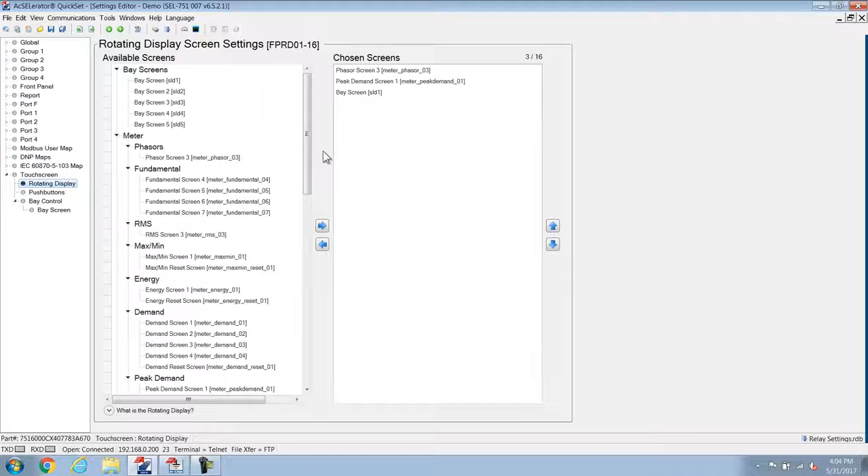Another portion here is the push buttons. The push buttons on the relay can be programmed to open specific screens on the device. Since we're going to be working with the bay screen today, I'm going to change push button 8 to show bay screen 1, or single line diagram 1.

Next is the bay control section. This is where I can either create a new bay diagram or single line diagram, edit an existing single line diagram, reset to defaults, and also import and export them.

I've already selected edit here, so we'll jump into the new piece of software that comes with AcSELerator QuickSet, which is Bay Screen Builder. Now that I have Bay Screen Builder open, a few things to notice here are the symbols.

In this symbol palette, you will see breaker symbols, disconnect symbols, analog and digital values, as well as other symbols available to create your one-line diagram. These symbols are available in both IEC and ANSI.

As you can see, I've already started creating a one-line diagram for our feeder. So today we're going to finish creating that one-line diagram with a few various objects.

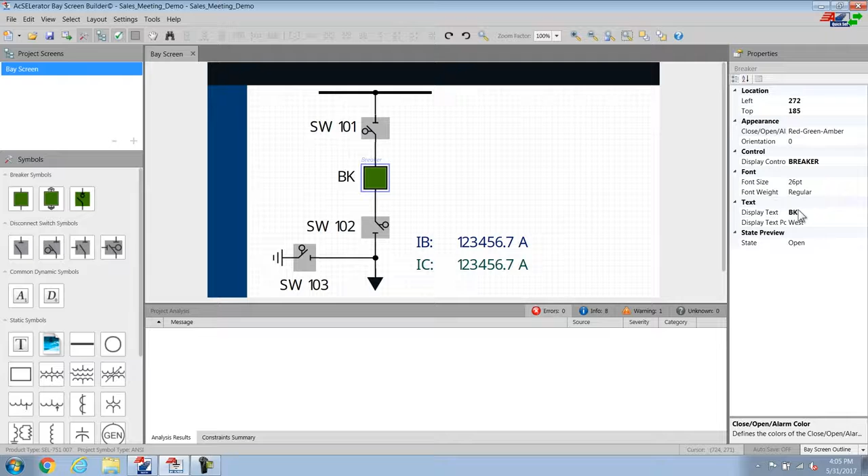The first thing I'm going to add is a breaker. I add an object by simply dragging it onto the screen. I'm also going to label the breaker. Let's call it breaker 201.

The next thing I'm going to add is an analog label here. As you can see, I already have IB and IC. I am then going to align this label with the labels I have already created, with the text of IA for phase A current going through that breaker.

I'd also like to see the units with 1 decimal place. And for the last portion of this analog quantity, I will set the units to amps.

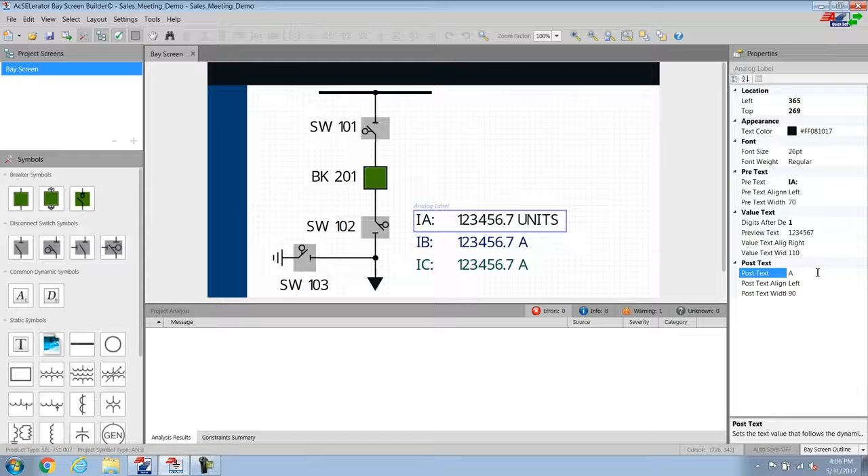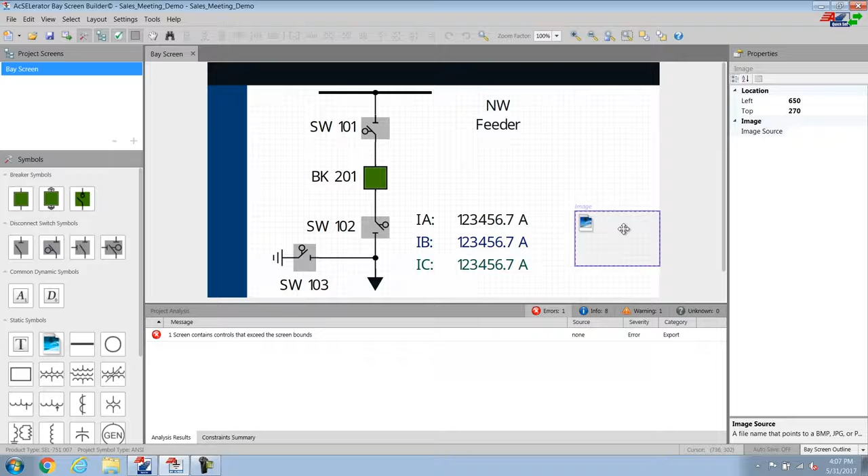Next, I will label this feeder using the text box. I can edit this by simply double-clicking it. We'll call this Northwest Feeder, and select OK. For the last portion of this one-line diagram, I'm going to add an image to the screen.

I can select the image that is used by clicking this button here, selecting company logo. As you can see, I've created a company logo for the utility, Great Utility Company. Again, I'm going to align it into the corner of the screen.

And there you have it. You have a completed one-line diagram. Next, I will publish this, or send this, to AcSELerator QuickSet.

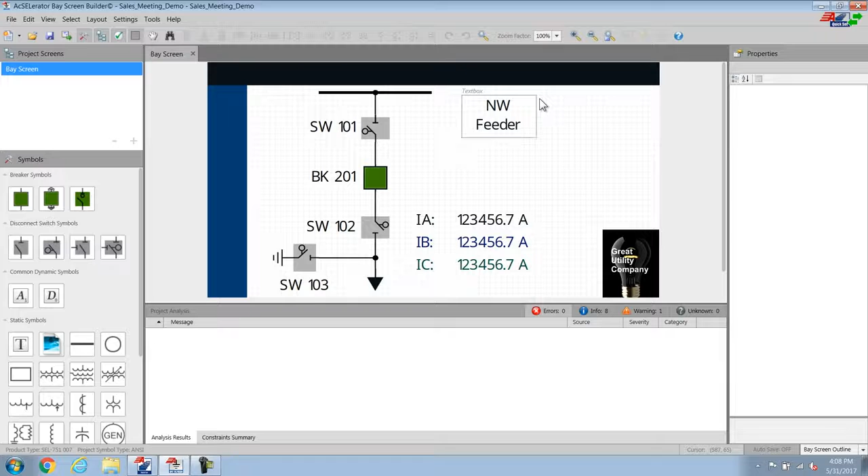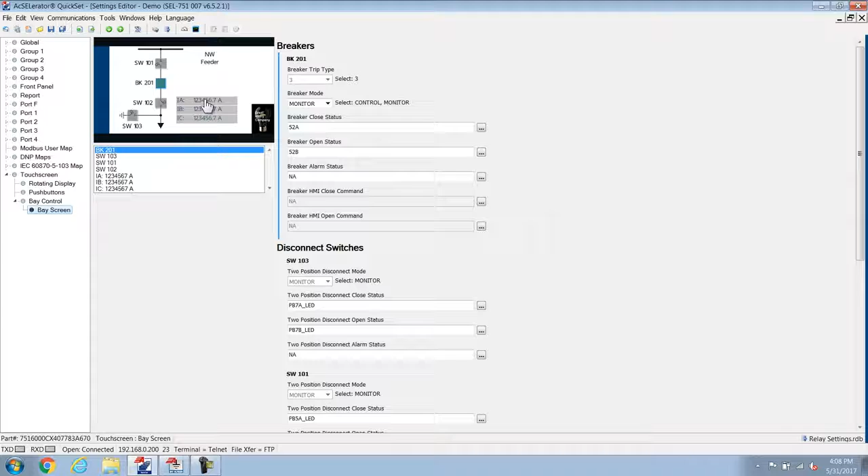The screen here will show the updated one-line diagram once it has been sent. Next, I will set that analog quantity of IA to show the phase A current going through the breaker. You can do this by clicking on IA on the preview image of the one-line diagram here.

Next, I will select the option here at the end and select IA magnitude.

For the last step, I will send this one-line diagram as well as the associated settings to the relay. This is done in the same way that we have sent settings to other SEL products and relays. So I'll simply press the send button here.

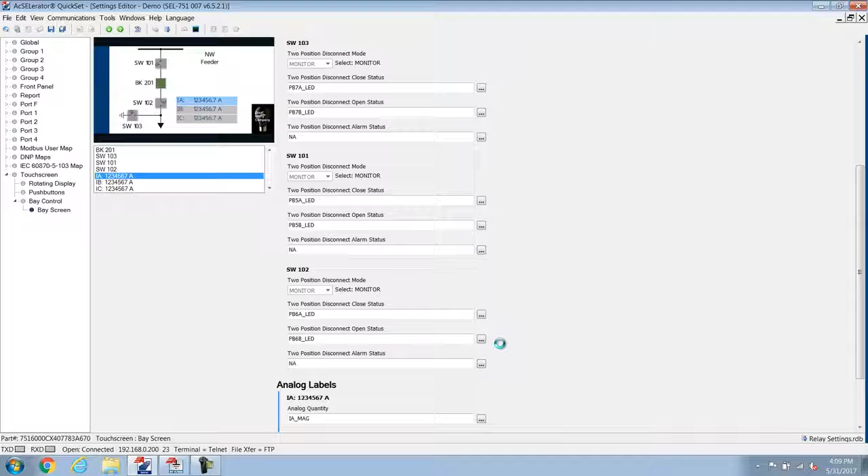Once communications have been connected, touchscreen settings were the only thing I changed, so I will then send those to the device. And in a moment, the relay will be updated and I will push button 8 to show you the newly configured one-line diagram.

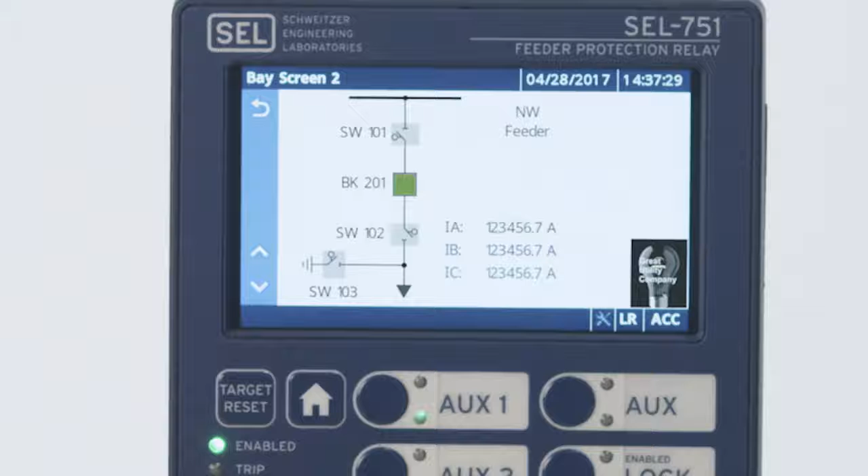As you can see on the screen, an updated one-line diagram with company logo, analog values, feeder name, and a breaker are now available on the screen. That is how easy it is to create your very own one-line diagram to meet your specific application and needs.